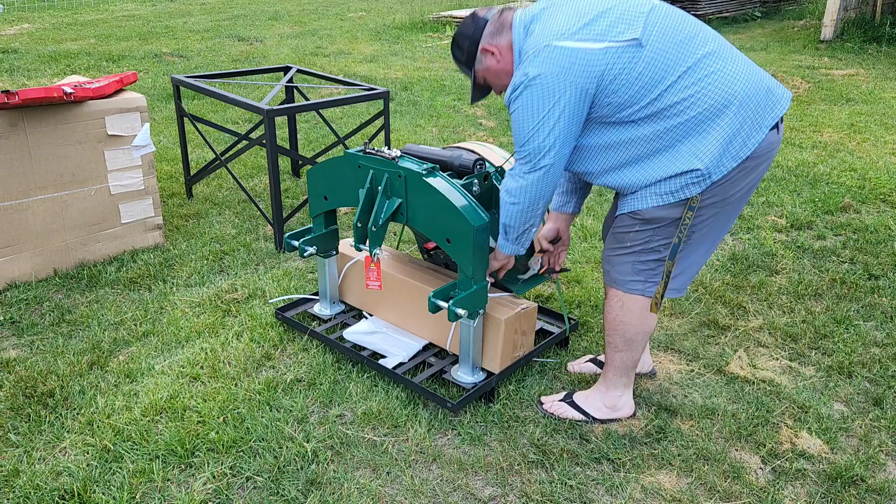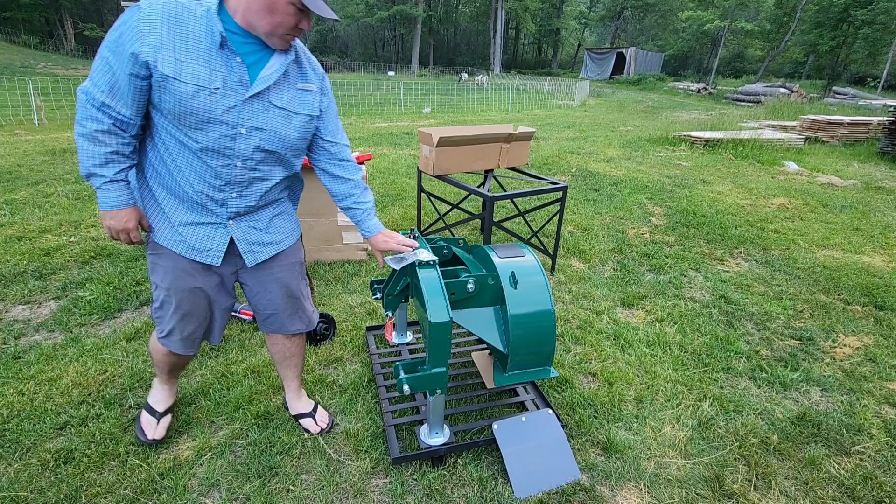Okay, so we've gotten pretty much everything off of here that we need to take off at this time.

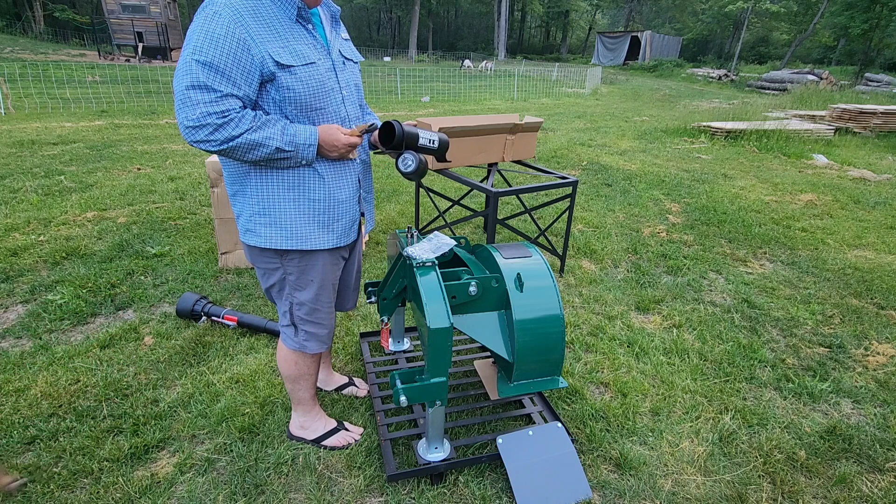This little tube right here that has the user manual and instructions for putting everything together has two important things. First off, it has a wrench that's used in the removal of the teeth, as well as these nuts, bolts, and washers, which are for this plate right here. I could not find these because I didn't look in here—I figured I could put this thing together pretty easily. Well, or maybe I did look in here, but these were stuck in the bottom so I didn't see them, way down in there. So those are the four bolts, nuts, washers, and everything for this portion right here. We'll get to that in a second.

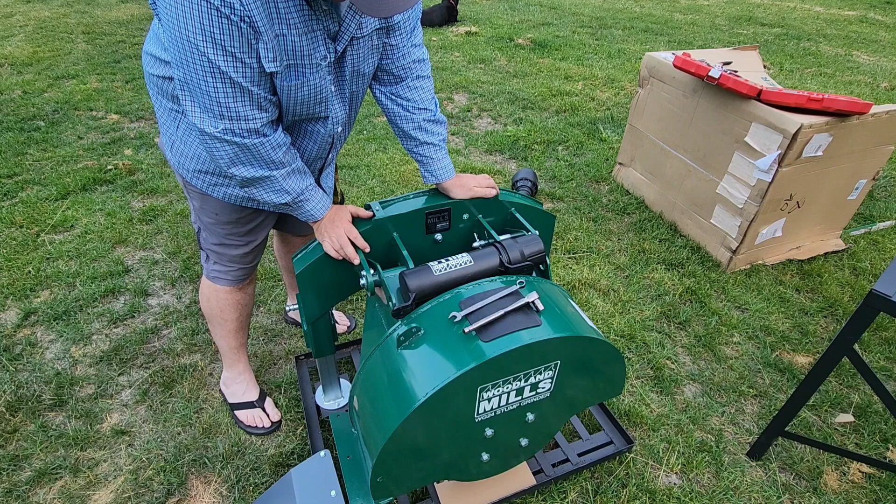The next thing you've got to do is loosen up—let me show this on the back side—this bolt right here. We're going to loosen up that bolt and rotate this front plate upwards. They have it like this for shipping so it can fit into the specific size box that they have. Let me figure out what size does that, I don't remember from beforehand. Got a feeling it's going to be something large. Let's see, 3/4? Yep, 3/4, so there you have it.

So you just loosen that up and spin her right side up. Okay, so now we've got that right side up. Again, go into our tube right here and get out the bolts, nuts, and washers for these ones right here.

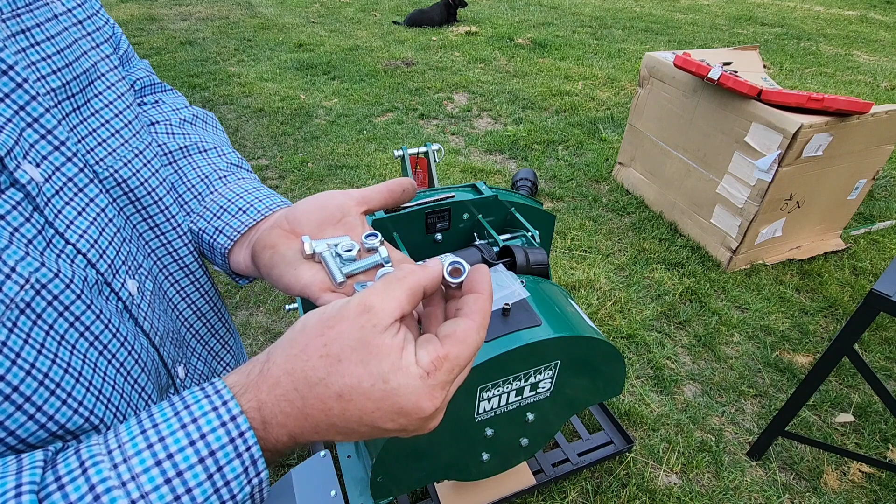I'm going to throw in a time lapse so I don't bore you with putting these in here. As you can see, you've got the bolt, the washers, and the nylon nuts so they won't back out.

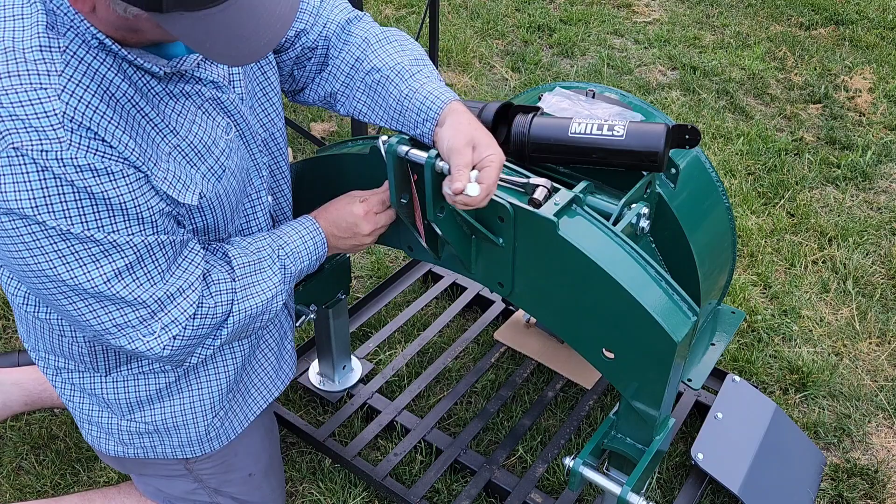Okay, so what I'll do is just go ahead and speed it up—I'm not going to do a time lapse, that way I'll at least show something. 3/4 inch, same as the one on the other side, really easy, so you don't even have to take the socket off. Go bolt, washer through the hole, then a washer and nylon nut. Do that for each of them—pretty simple.

Okay, so that's done, and we're almost done here. Now, there's also a chainsaw holder you can put on here, and there's also this tube you can put on here. The machine is a violent machine, meaning there's a lot of vibrations that occur. So at this time, I will not put on the chainsaw holder nor that tube.

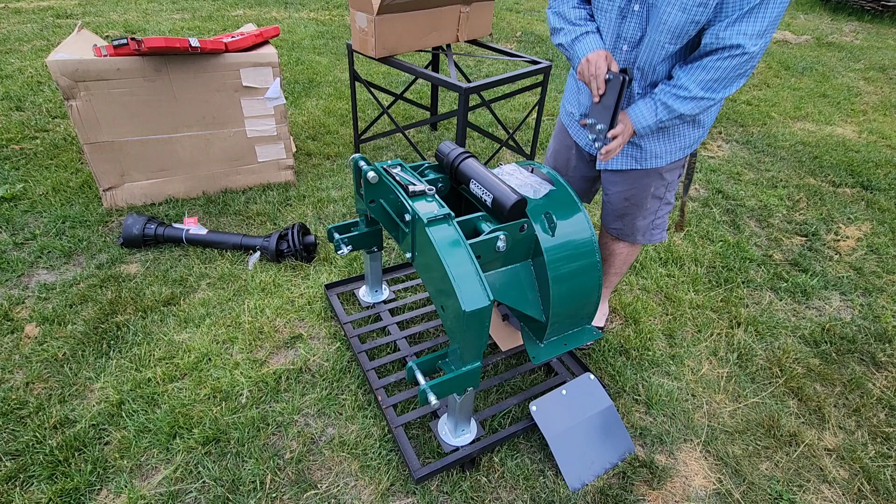The chainsaw holder piece is this doohickey right here, and she goes on right there. It already has the bolts, nuts, and washers all on there. Holds on, clamping mechanism. You've got a rubber pad right here so that your blade won't tear into the metal. It's a really cool design.

However, I intend to grind with this thing in areas that are easily accessible, so I'm not going deep into the woods at this time. So I'm not going to put my chainsaw holder on there, as well as this thing right here. I don't really need this on here. It's just another thing I think I'm going to break, or it's going to rattle off or something like that.

So again, I'm doing a modified little method here. Next thing is your plate. Plate on this one, bolts, nuts, washers already on there, correct orientation. Plate goes just right here. That just stops any debris from being kicked up, or it could potentially come back and hit you or someone that's operating around the machine.

What size are these? Looks like 1/2 inch. Convenient. So 3/4 and 1/2 inch will pretty much put her all together for you. Oh, that's not easy. So that's convenient when you know the socket size and wrench sizes before you actually start the job.

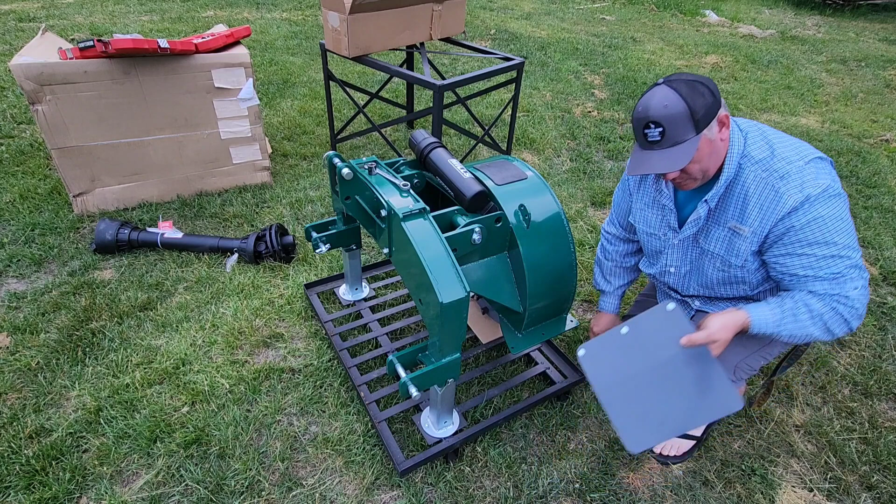I'm wearing this outfit because my daughter and I just got back from going fishing. We went onto Bagley Flowage. We did about 4 miles. I was very proud of her because she did her own kayak and I did mine. We have pedal driven kayaks, actually we've got a couple of them, but the 2 we took out are the Old Town ones. Pretty cool, we had a great time with them.

Now technically, I think the washer should be on the bottom side, but I really don't care. I don't think it's going to matter one way or the other. A lot of debris is going to be in that area there. So it would not hurt to have an additional washer on the bottom, but again, this plate here is really just a deflector, nothing else. Therefore, not too concerned about it.

You can probably even get by without having this on here, but again, it's more of a safety thing, and it'll prevent all your debris from flying 20 feet out. It'll fly like just right here now.

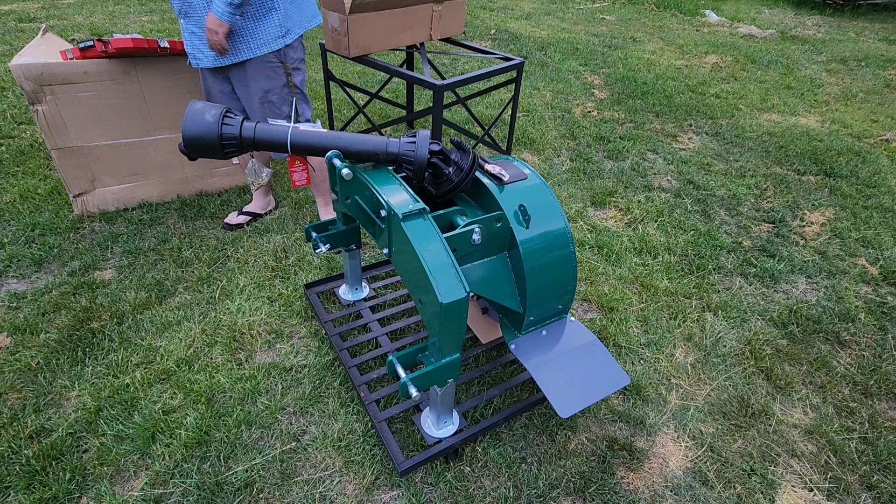So let's go ahead and remove this. What size is it? To tell you the truth, it kind of looks like it's 3/4. I hope it is, that'd be nice. It's 3/4 - convenient.

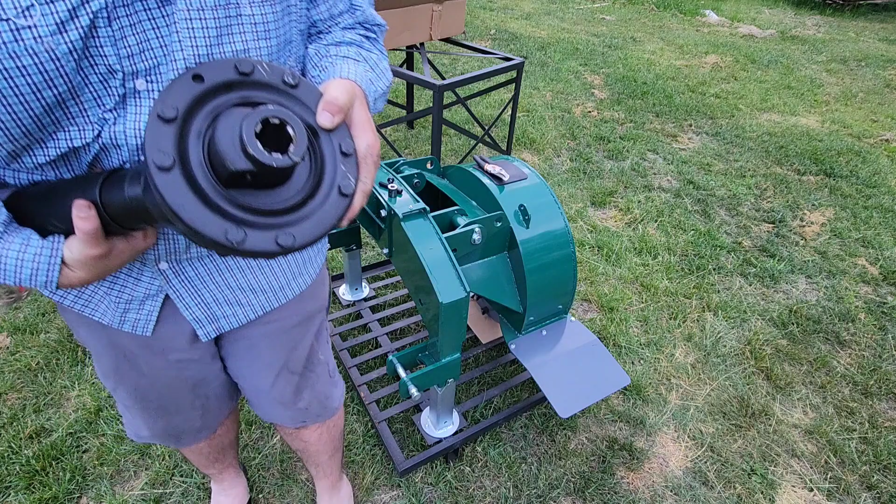Yeah, I'm doing this in flip-flops, which is probably not ideal. But again, it's kind of a weird tapered shaft on that pin right there. What you'll have to do is match up the splines and threads that are on here with those on the actual implement. Try not to crush your hands, your feet, or anything else. You want to do it so you can get that tapered bolt nut thing in there, so you need to be able to look right there.

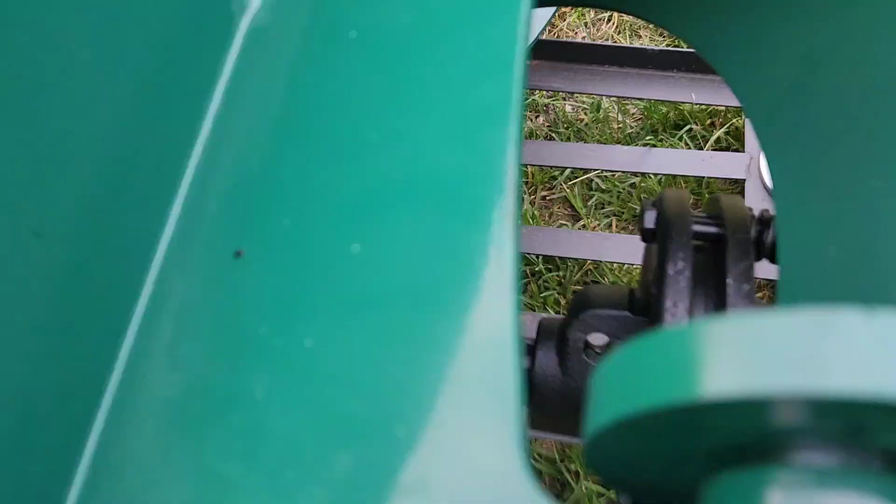I'll show you what I'm talking about. Trying to match up the hole. If you see that hole right there - let me make this thing focus - you can see I've lined up a clear shot all the way through.

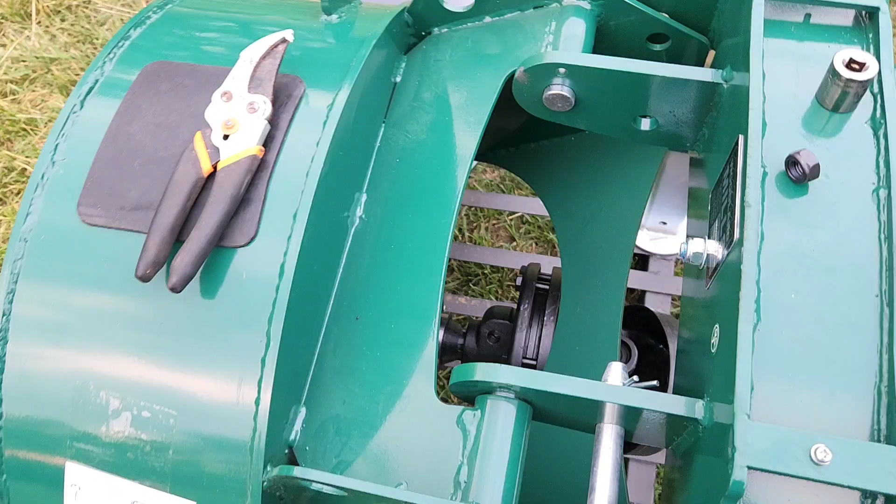Now there is a correct direction and an incorrect direction to put this in there. That is not the correct direction - gotta go from the other side. Okay, it appears that was the correct direction, so I've got that pin going through. Go ahead and get it where she bottoms out.

We'll put the nut on the bottom here, and as we tighten it up, it will continue to seat into there properly. Let me get my wrench or ratchet. I'm going to do that until I have threads coming out, but that's the gist of it. Got that pin through there.

One of the things I was really impressed with on our other one is how well this thing is balanced when she's spinning up to full speed. It's quite impressive. All right, so let's come back tomorrow morning - we'll go ahead and attach this to a tractor and show you some operations of it.

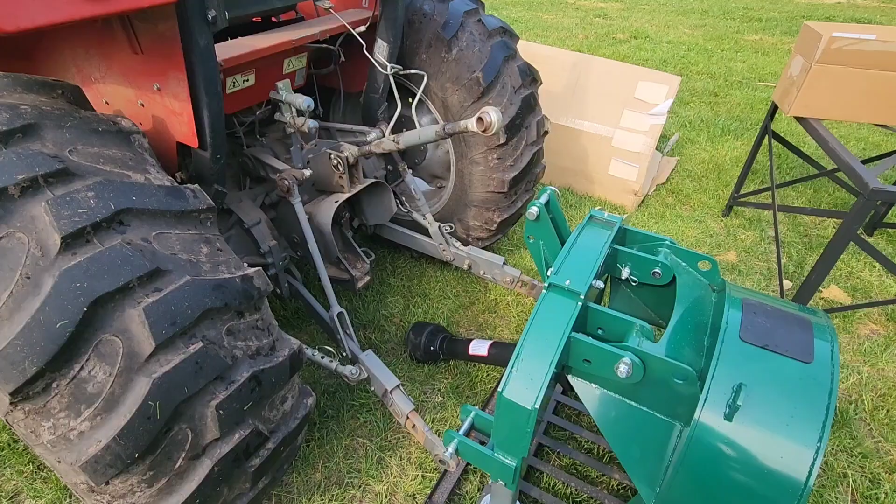Stay tuned. Okay, so it's the next morning, we're gonna go ahead and hook this up. All I've done thus far is back the tractor up, and I hooked up this chain - there's 2 chains on here onto the side of the machine. First things first, one thing I liked about this is that they actually give you pins and everything.

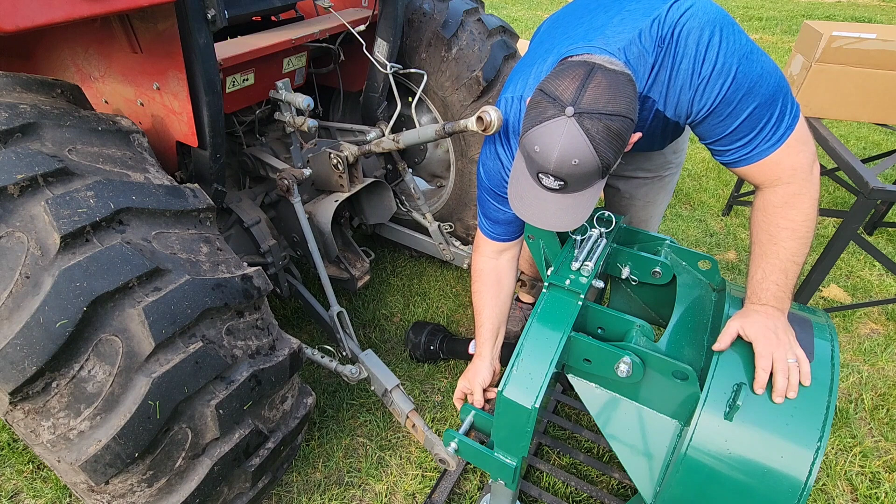That's actually a big plus, because I can't tell you how many times I'm searching for the right size pin to go somewhere on a piece of equipment. I keep them in my toolbox on the tractor, but again, you can never have enough of these pins. It's just little things like that that add up, so I'm pretty happy about that.

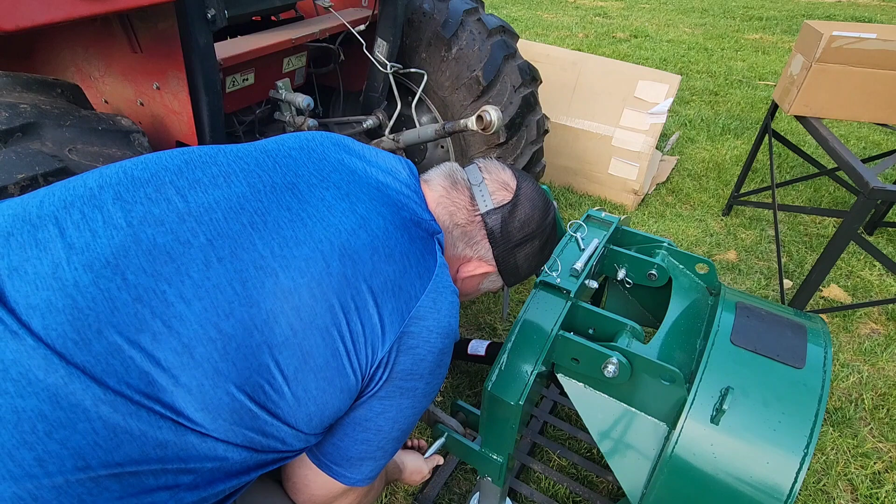All right, if I do this correctly, put these through - you can see I've got the extensions out on the actual 3-point hitch here. Really helpful when attaching a piece of equipment. A little bit off on this one, it looks like. This thing's heavy - I guess it's like 500 pounds, and it's every bit of 500 pounds.

As you can see, I've got those extensions out though. Whenever I back the tractor, those will lock in place. Pretty cool - old tractors used to not have that. It's really helpful when fine-tuning, when you're not exactly right on your tool. I'll have to adjust this here in a second - at least get this on there. I need to add the sleeve. Let's see if it'll fit. Yep.

Just tighten just a little bit, not much. Now for the fun part. The good thing is, my tractor, I'm able to take the 3-point, or the PTO, and put it in neutral. So I've got that neutral. I went ahead and greased up everything prior to this, and also got dirt on this prior to. That helps, I hear.

Slide this up on there. Those threads match up. Depress the pin, lock her in place. Go ahead and put my little chain on. I can hook it on really anywhere. I'll hook it on right here.

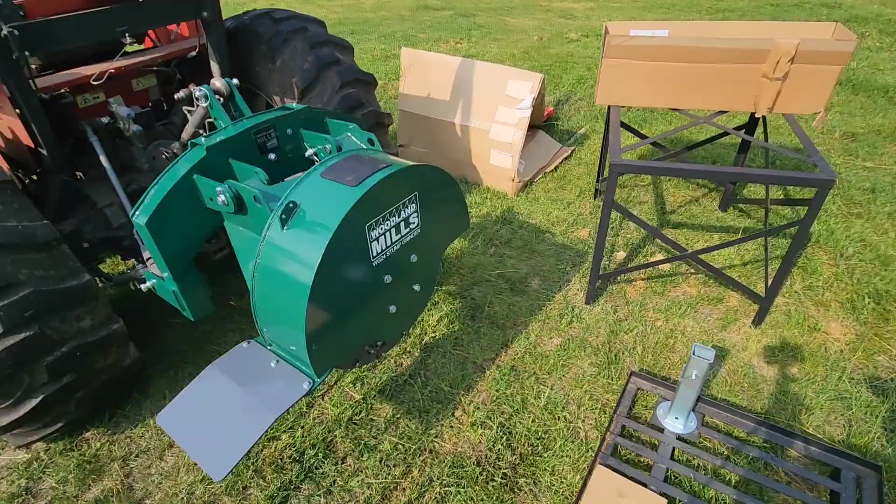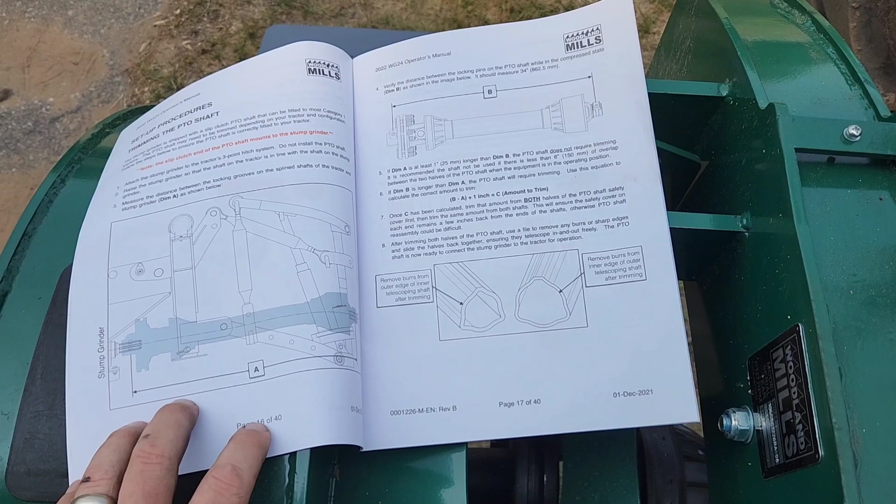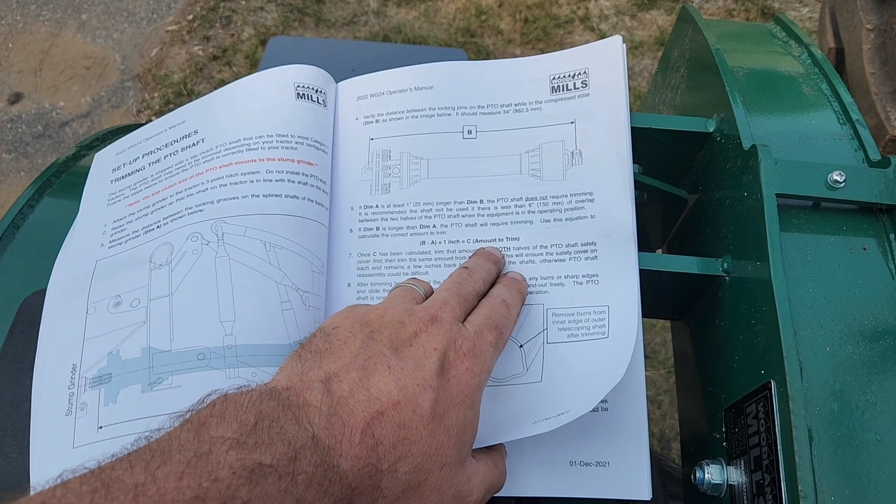Okay, one last thing I'm going to talk about. Again, since I have a larger tractor here, as well as my dad's tractor, we did not actually have to cut the PTO shaft. If you have a smaller tractor, you may have to do so. You've got an A measurement, you got a B measurement. If A is at least 1 inch longer than the B measurement, you don't have to worry about cutting. If it's anything less, then it tells you the amount of trim - that would be your C measurement.

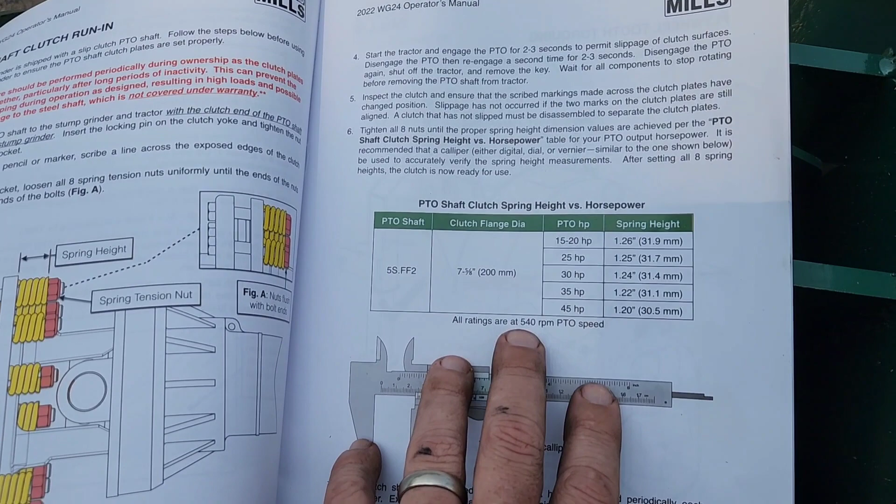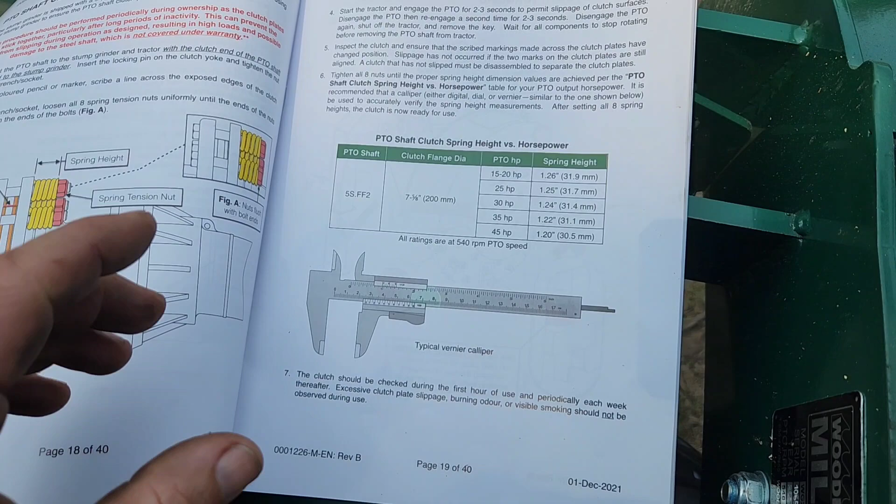Also, you have the PTO slip clutch. The slip clutch itself, they give you a nice little chart in the book. It tells you, based on your PTO horsepower, what the spring height needs to be. Now, I don't have a set of calipers, I've got to use a little tape measure. It'll give me an approximate reading. This tractor here is a 48 horsepower tractor, I believe my PTO horsepower is around 40, 42, something like that.

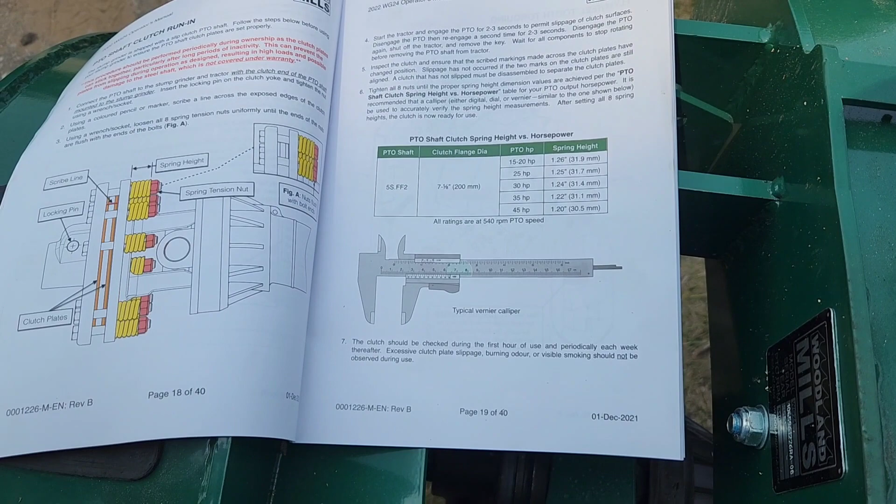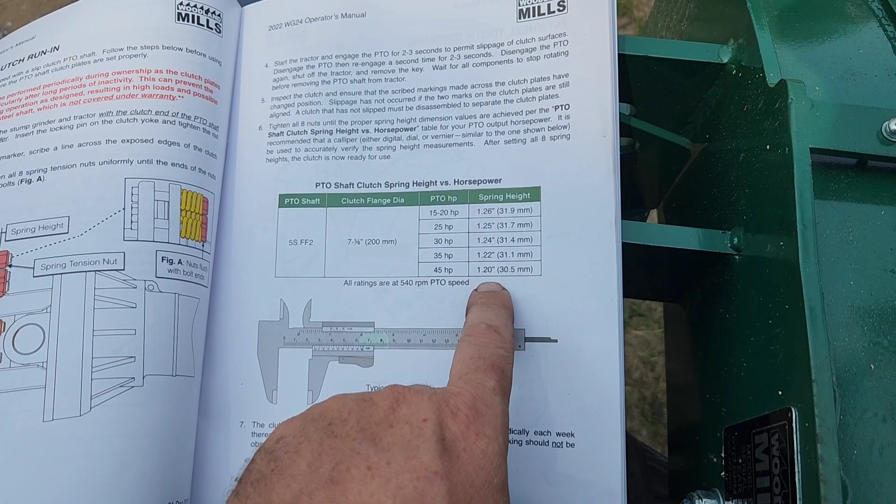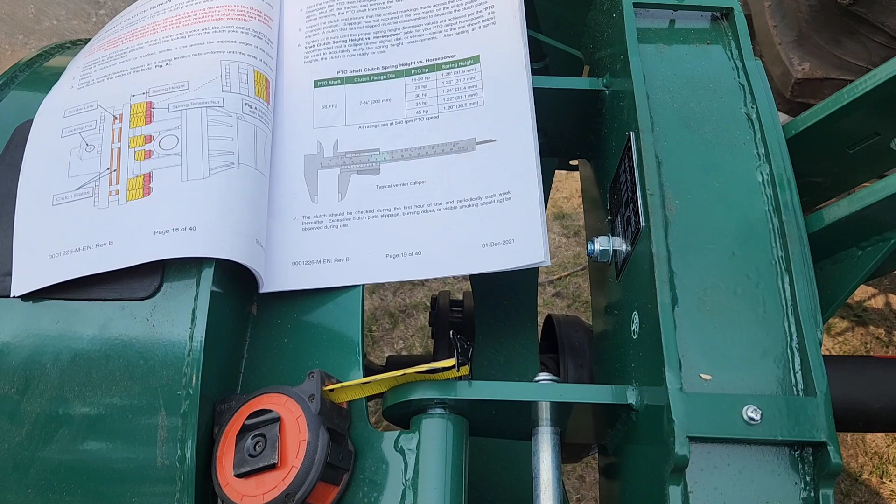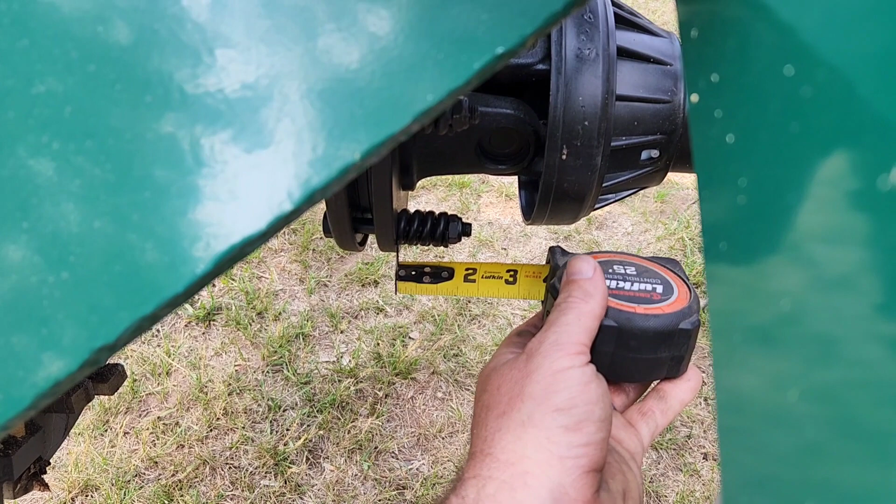But I'm going to shoot for something between 1.22 to 1.20, and I will say that is hard to read on a tape measure. So I'm going to err on the side of caution. I'm going to be slightly under 1.25 inches. I'll probably err in that 35 horsepower range, because I would much rather have this slip clutch slip than the PTO clutch slipping. And that right there is pretty easy - you just get a tape measure, throw it on there, and I know you really can't see that well from here, but I'm slightly under 1.25 inches. All the bolts and springs are to that same dimension, and we are good to go.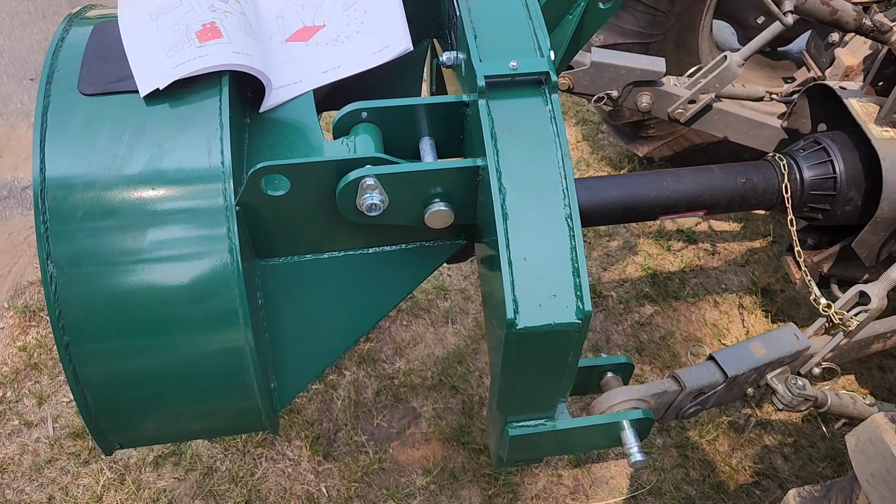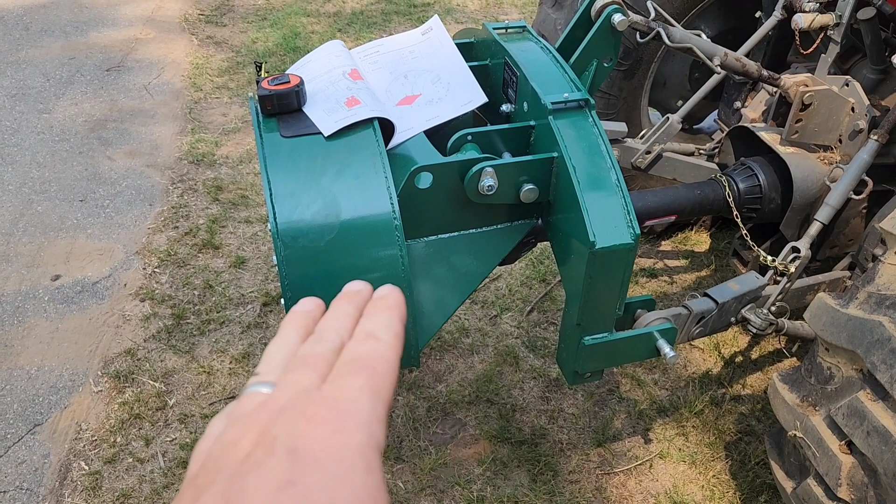Also, what you'll have to do before you start getting hot and heavy into it - this pin here, it's on the pivot arm. Go ahead and remove that, I can't do it with one hand, but I'll lift up on this piece a little bit, take out this pin, and it will allow that head to pivot out. That right there is an extra safety, because as you're cutting through the log, if it really starts to bind up, it won't get too bound up and put undue pressure on the disc. I would hate to get this disc out of alignment, because she spins like a champ.

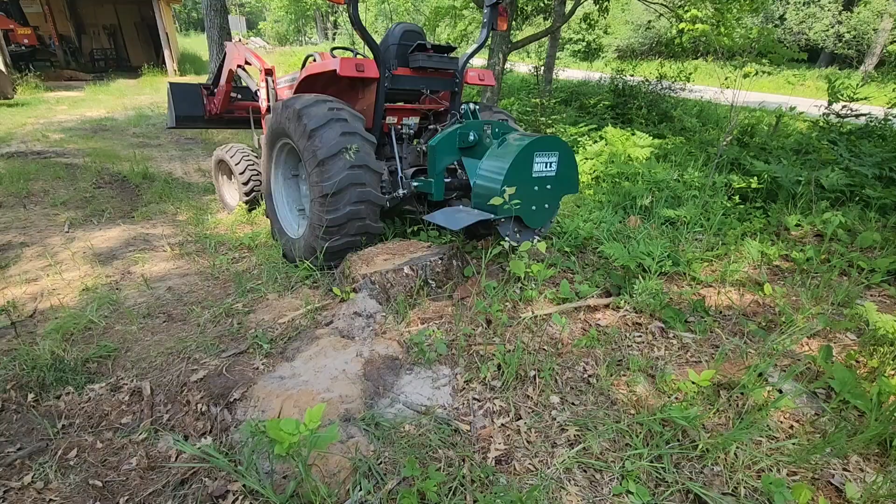All right, folks, we've got the tractor set up here on a rather large oak log, about 29 inches in diameter. We're gonna go ahead and remove this. I'm gonna try this from a different angle. I've approached logs from this side before, I'm gonna try it on that side. I've seen videos on both ways, and I've done it both ways, but let me just see which one turns out better. I also have tightened up my swing arms left to right, so hopefully the machine won't jump around as much.

And yeah, we'll see how that goes. Also, when I was getting this all set up, I had noticed this the other day while clearing out the fence line here, trying to get this ready. There was a large yellow jacket's nest in an old stump that was here. This is one that I pushed down, whole stump came out and everything.

So there was a large yellow jacket's nest there. I promptly just put all this sawdust on top of it, hopefully to keep them at bay while I'm working here, so they don't absolutely destroy me and the dogs as we're working here trying to get this stump removed. I'm gonna go and set the camera up about right here. I think this is a good location, and we'll see how this goes.

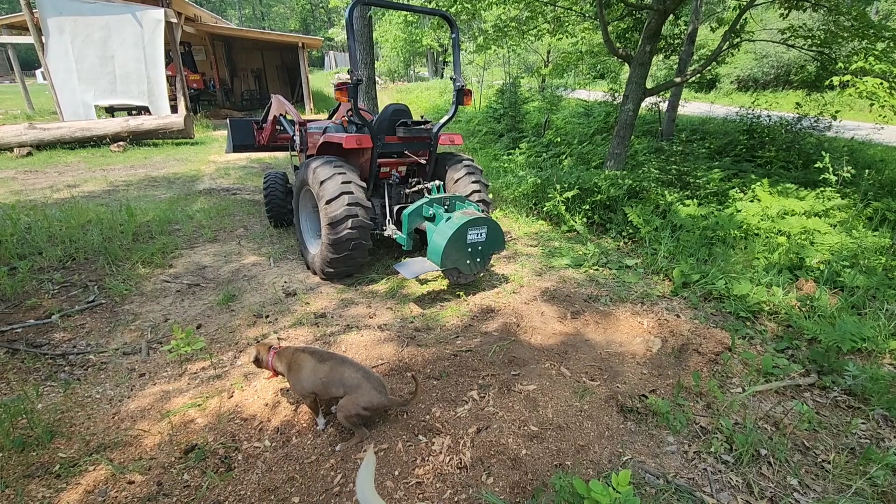And again, I have a geared tractor, not a hydrostatic. So I have her in granny low, and I really have to kind of feather the clutch in a little bit and everything. It's not too shabby, but it works. And especially for home use, what I'm going to be using this for, just clearing out trees on my property and fence lines, this will definitely work.

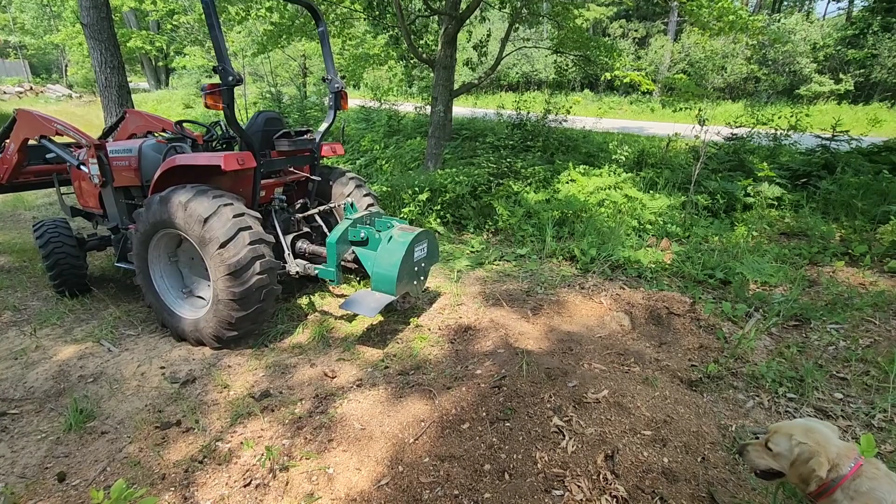So hopefully you found this interesting. Hopefully this video was helpful to someone out there. Very, very awesome tool to have on the farm, especially if you're putting up fences and everything, because now I don't have to try to burn out a stump for multiple years and never get it out. This thing will actually remove it, and you get a lot of mulch and stuff.

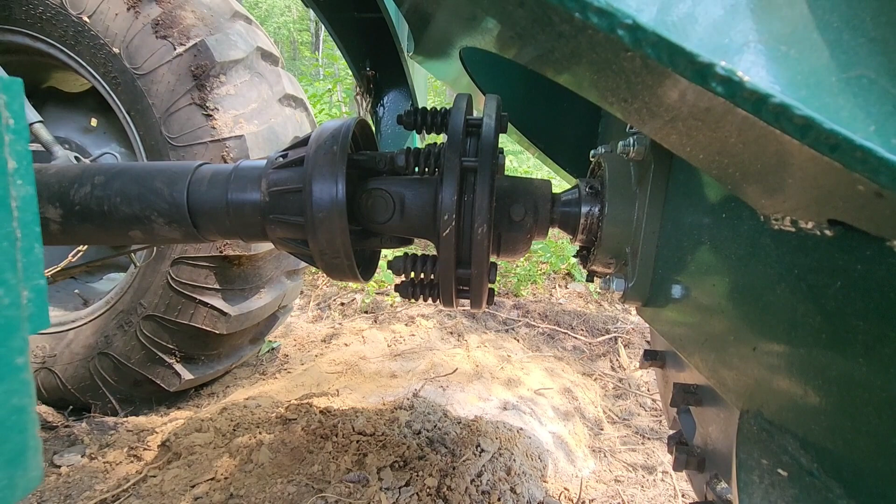And okay, folks, I want to do one last little bit here. So it has been approximately 2.5 hours since I finished that last portion of the video there. Let's see if I can show this, if it'll show. You can't see any heat coming off that clutch, but I will say this: I will have to tighten up that clutch.

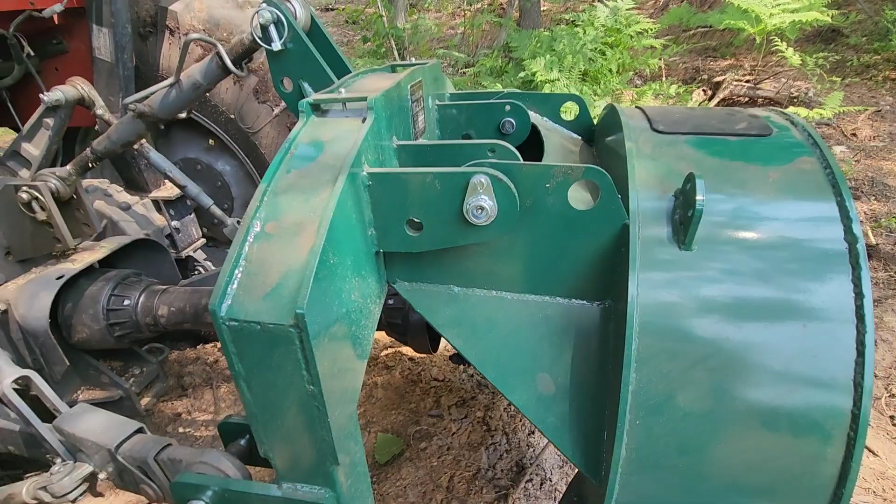I am starting to move it around and everything. It is starting to slip a whole lot. Well, I say a whole lot, it slips. But I was also taking some very aggressive cuts on this oak log or oak stump that I just cut up. 15 or 16 stumps removed, also clearing a lot of other property. Very impressed with the machine.

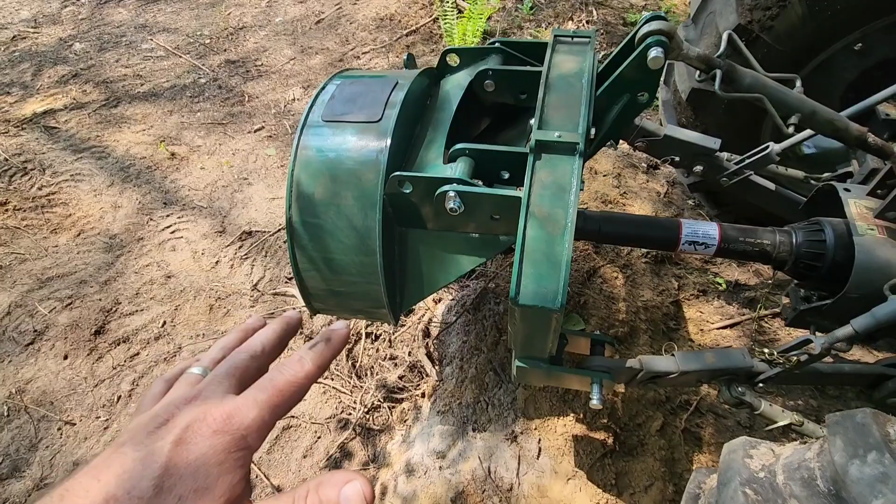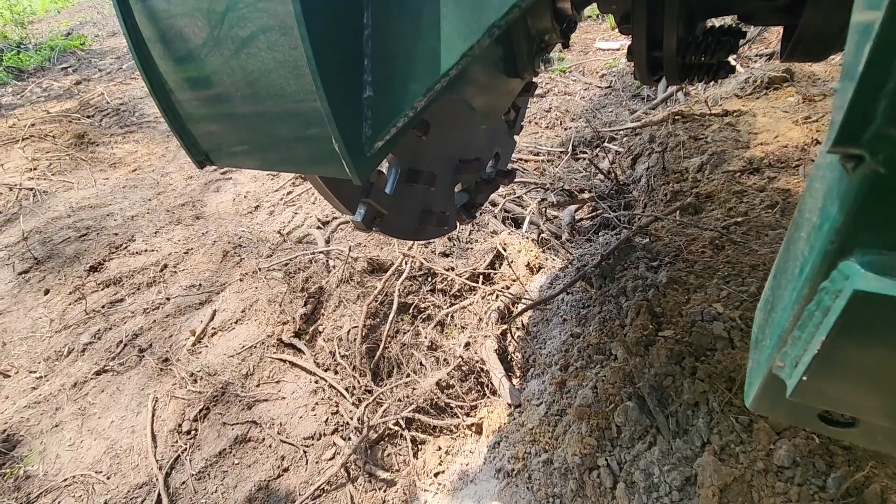It is phenomenal. I will say the visuals when you're trying to look back from the cockpit and everything, I have found I look through literally like right here, and I'm keeping an eye on the actual spinning disc and everything. But I will say the visuals are kind of hard because it's so far down into the ground behind and everything. But other than that, it's great.

So my neck is a bit sore from turning around and everything. But again, just to take out all those stumps and everything is fantastic. Now that all of our obstacles have been removed, again, like I said, 15 or 16 stumps, I did the whole perimeter of the property behind the house and everything over to here. My last stump was just over here.

Very impressed with the machine, well worth it. But essentially I've removed all the stumps off my property now. So there's really not much more to do with the machine currently. And that's why I'm going to start going out and removing stumps at my buddy's house. This is the last oak stump that I removed right here. This is about a 33-inch diameter red oak log, or red oak stump, excuse me.

And yeah, all right, now we got to get to stretching that fence. The work really begins now.